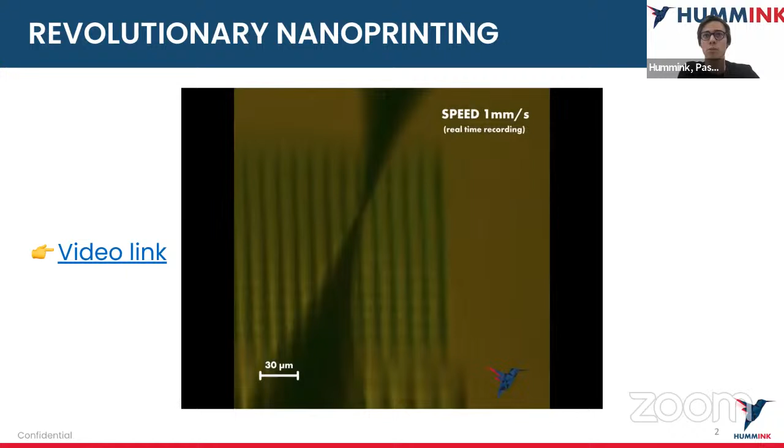To start with, a first video of what we do. Here it's an example of deposition of silver with a resolution of 1 micron, shown at real speed. This is a breakthrough technology we have developed that enables such deposition with any type of material. The question you may have now is, what's under the hood and how do we do this?

Here's a close-up on our technology, which is derived from AFM technologies. We basically replace the probe of an atomic force microscope with a glass capillary, filled with liquid. We replace a traditional resonator with a macro resonator, this big tuning fork, so that its oscillation properties are not impacted by the weight of the pipette.

We attach the pipette to the resonator, have it oscillating at a defined frequency. We put the substrate beneath on an XY table that comes close to the tip of the pipette until the formation of the first drop of liquid formed by capillarity. We then move the station on the XY axis to ensure the deposition you need.

With a unique combination of features: as I said, we can deposit any material on any surface, with resolutions from 100 nanometers to 50 microns. We also have 20 nanometer XY precision, and a deposition rate that's already fast, up to 10 millimeters per second.

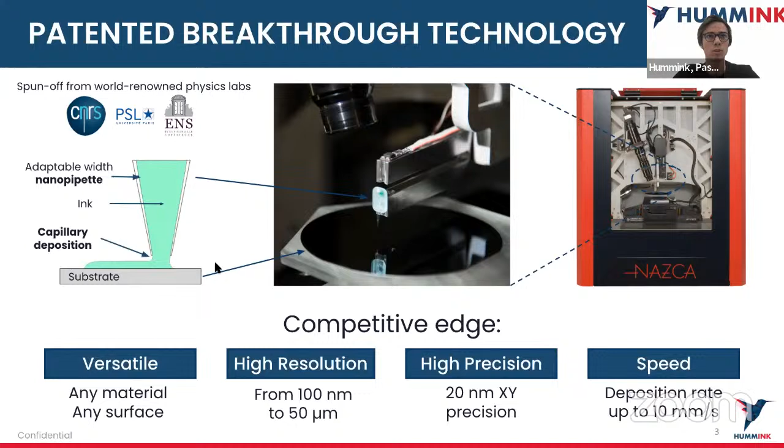Today I wanted to share with you the product release of our first equipment, called the Nazca machine. Here's a small video that shows it.

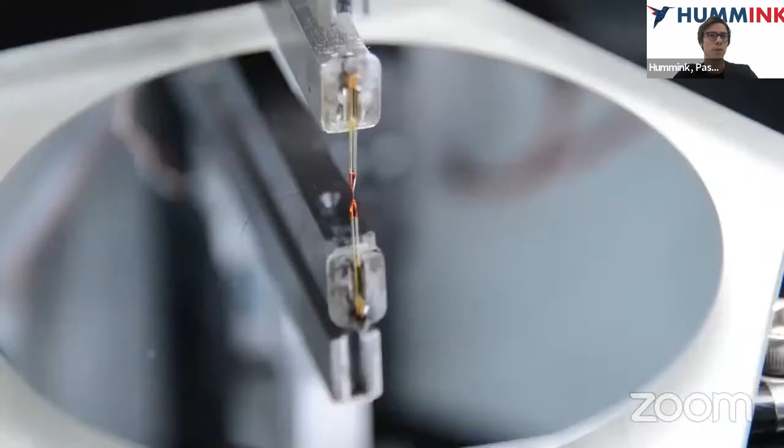The Nazca machine incorporates all the benefits of the technology I previously described. It's a tabletop equipment. Here you can change the ink and place any type of pipette. You decide the size, you decide the type of ink you want to use. You just use a very easy to use software, press start, and you're good to go.

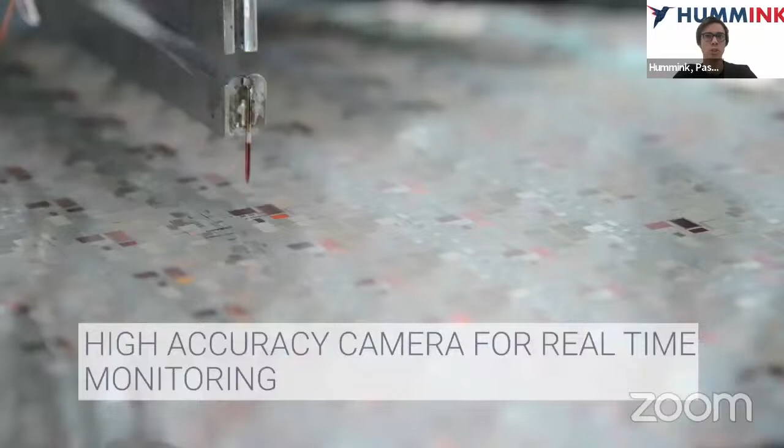This is a unique equipment that unlocks resolutions down to 100 nanometers with unique versatility in terms of substrates and material for the deposition. The working surface is 16 centimeters. You can use this for several types of applications, such as micro LED, packaging, but many more.

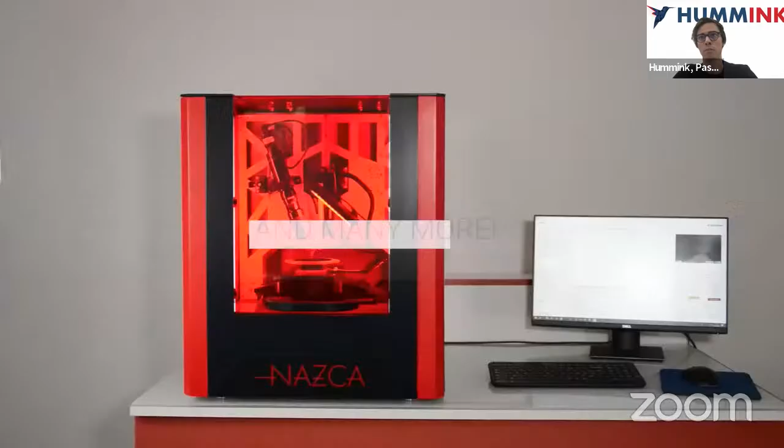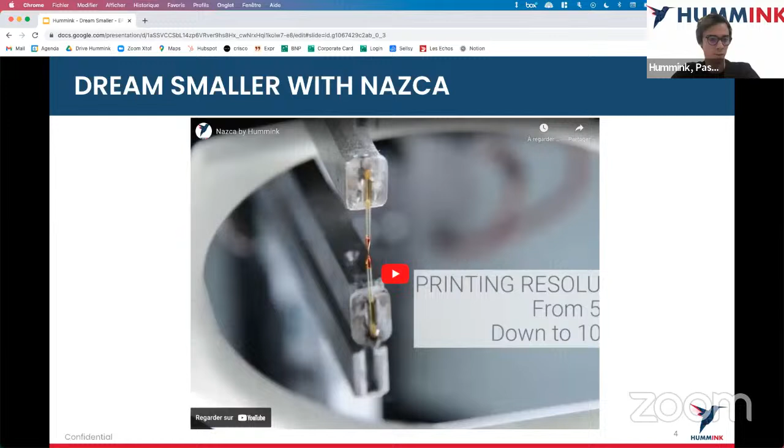This is really a product designed for R&D purposes, and designed for any labs that can work on several topics with one single tabletop equipment.

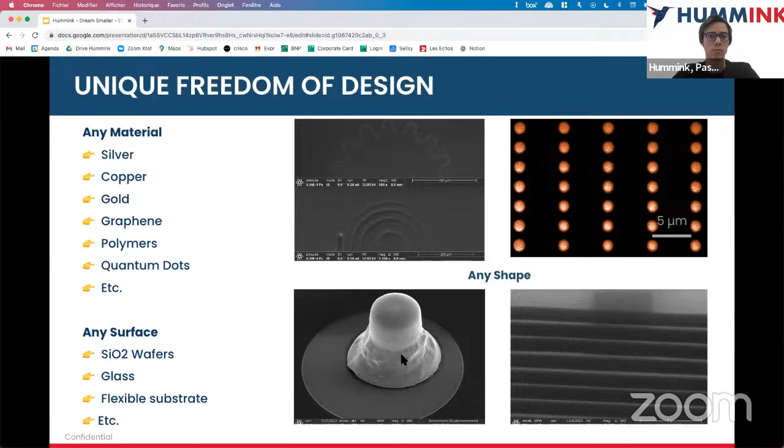So that's it, I wanted to fit into the 5 minute limit. I hope you enjoyed this presentation, and I'm all ears to any type of question you may have.

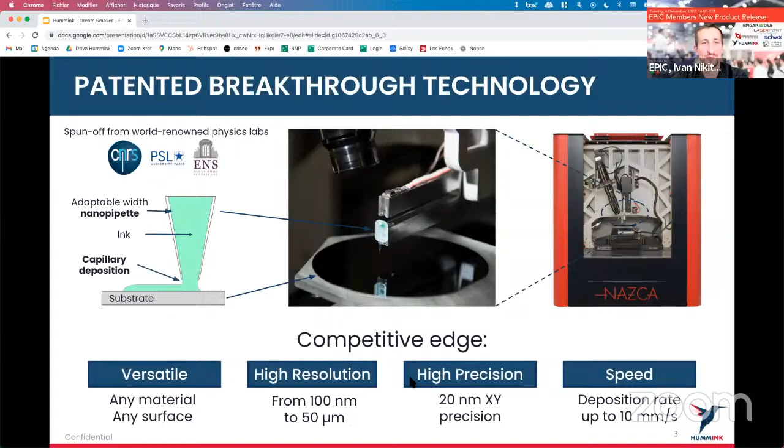Everything okay, can you see the screen correctly? Yes, all good. Thank you, Ivan. This talk is delivered by Laserpoint. I'm Sergio Pellegrino, company partner, managing the R&D activity of the company. The topic is about a new optical pressure sensor for harsh environment. I'll be more specific later.

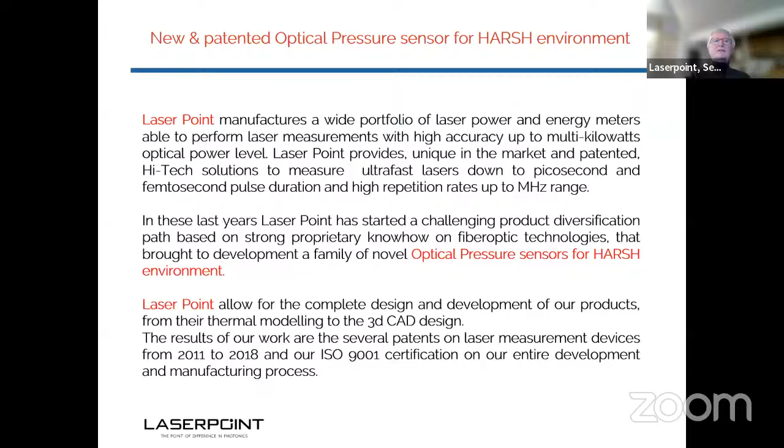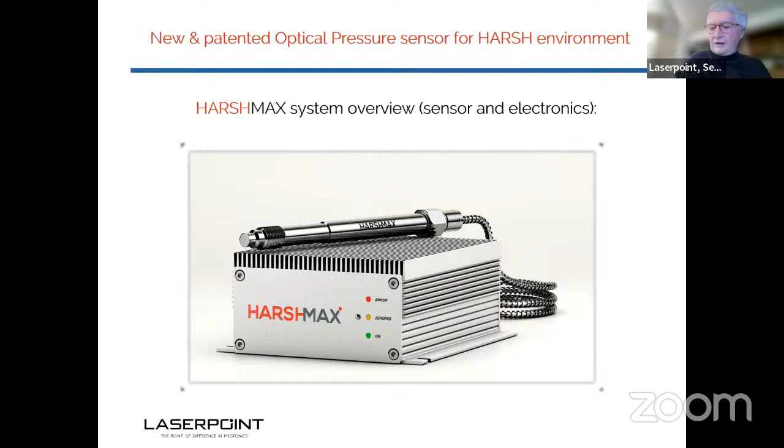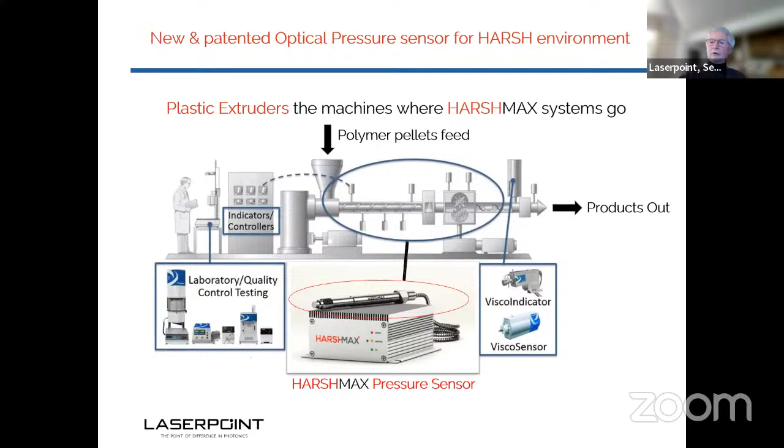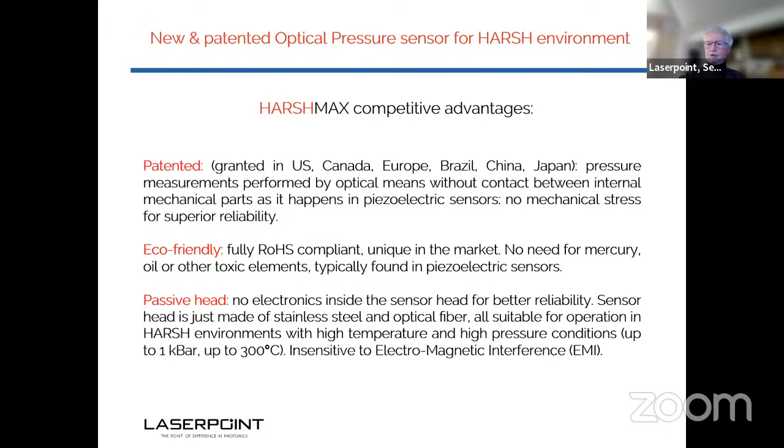So just a quick overview of the competitive advantage of the HarshMax. Beside the fact that it is patented, it is eco-friendly, because there is no mercury, no oil, no toxic elements - the head is just stainless steel and glass. The head is passive, so this is good. This passive part is what's in contact with the harsh environment, pressure and temperature, up to 1 kilobar in our product portfolio, and 300 degrees.

Another key point is that the rack with optics and electronics is remote, just connected by an optical fiber. So it's far from the harsh part and dirty part of the job, and it's easy to plug and unplug the sensor for eventual replacement. At the end, it has a low maintenance cost because of the high sensitivity of this system.

The deformable diaphragm is relatively thicker than competition. So it's more difficult to have it damaged.

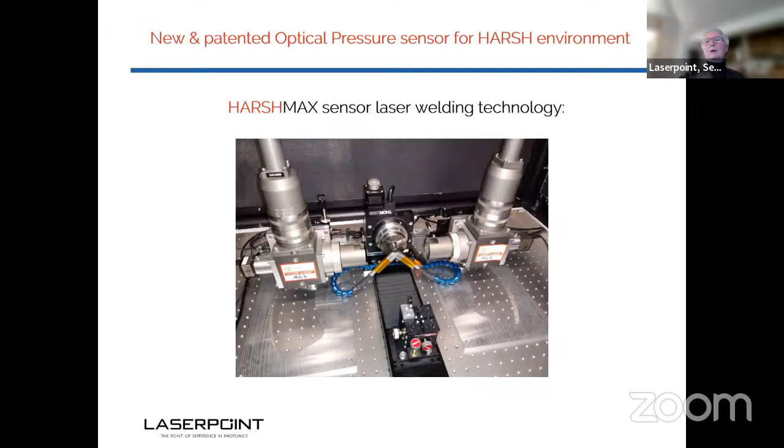So most of our technology, realization technology, is based on laser welding technology. There are several steps of laser welding technology here, just to show you which is our equipment in the R&D lab.

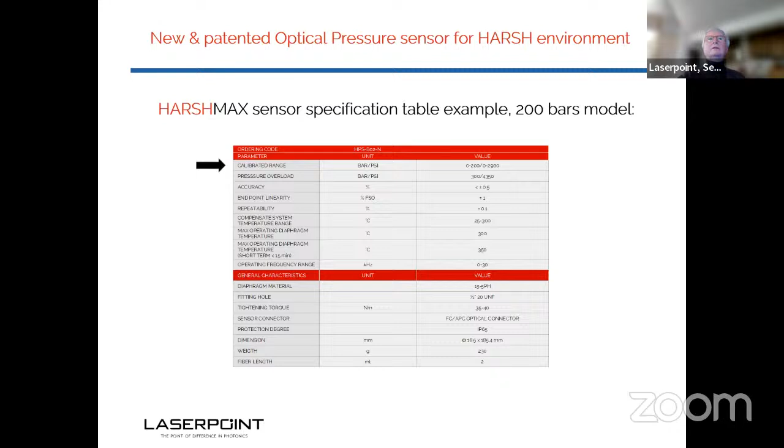Then we are close to the end, I hope I am in time. Just to show you an example of a sensor specification table for the 200 bars model. That sensor should stand to 1.5 times the maximum rated pressure, so in this case it's standing 300 bars, again at 300 degrees C. So here is the response of the sensors: pressure versus output voltage.

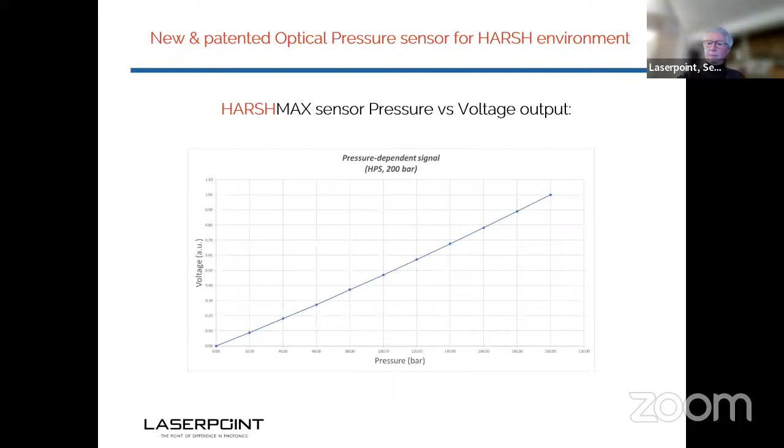You see that it is exceptionally linear, no hysteresis, which means that for us it makes the realization easier, because we do not have to apply a complex calibration algorithm to the system.

So in conclusion, we are introducing to the market of plastic extrusion and injection molding a new optical pressure sensor, we call it HARSHMAX, which is patented, eco-friendly, passive, with remote electronics, and a low maintenance cost. Thank you very much for your attention.

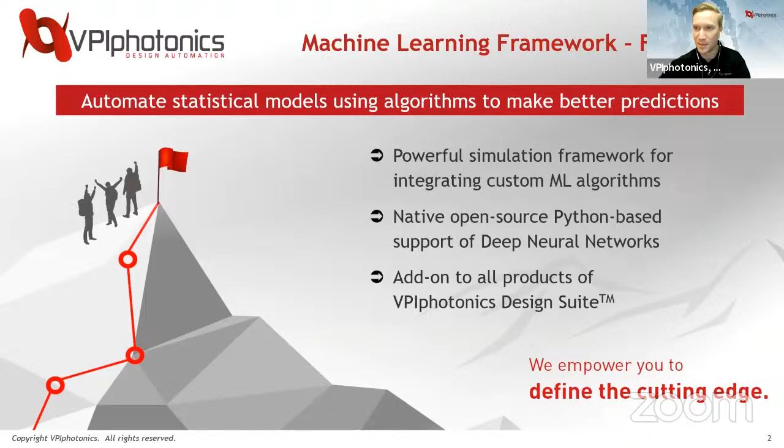So just to start, the machine learning framework is a way to automate statistical models using algorithms to make better predictions. What we've implemented is this powerful framework into the software using open source Python-based deep neural networks, and this is an add-on to all of our products in the VPIphotonics design suite. So to get you started with the workflow, how this actually works is you start with VPI Design Suite, you simulate, you create a design for a component or a system, as you would in the typical software.

We have an API where you can define your machine learning algorithm. We represent the data so you can store large sets using an HDF5 file format. Then we take our machine learning algorithm, generate simulation data for it, and use that data to train the machine learning algorithm. In the end, we have a machine learning model, and we can use that integrated model and algorithm back in your simulation again.

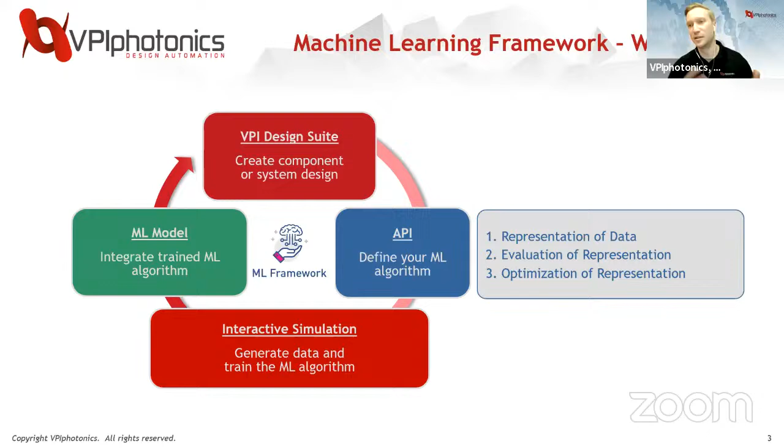This fits into VPIphotonics design suite. We have tools at many different levels of abstraction, from devices all the way to networks. This fits in VPIphotonics design suite, which includes transmission design, so optical system, VPI transmission maker optical systems, as well as component design. If you're designing a fiber amplifier, you can use VPI component maker fiber optics, or if you're designing a photonic integrated circuit, it can be used in VPI component maker photonic circuits. Really where we started with this is at the optical transmission system level. I'll take you through an example of that today.

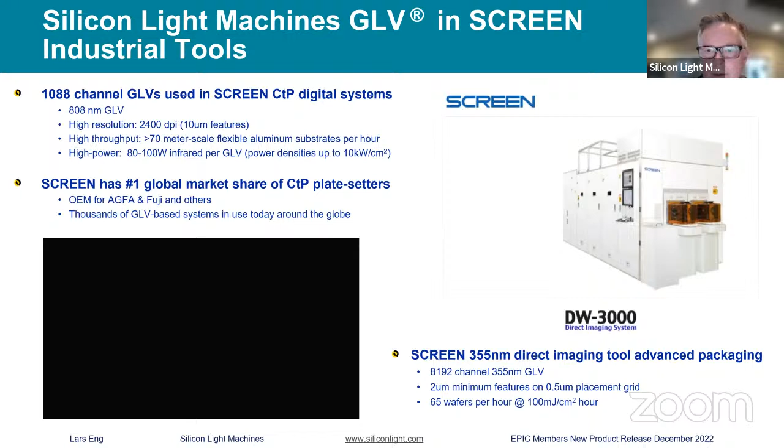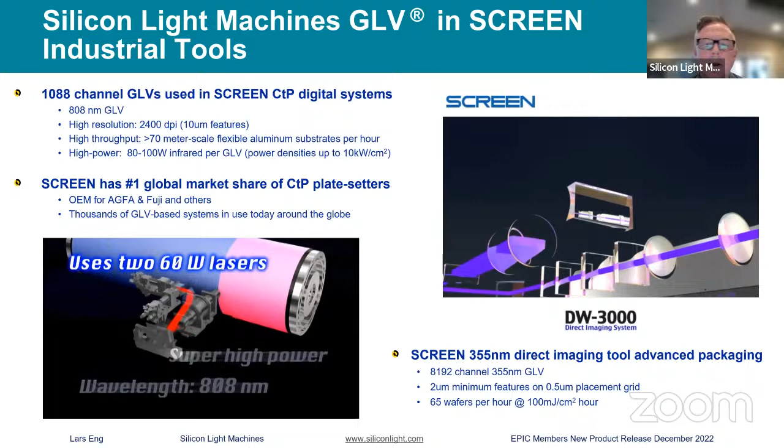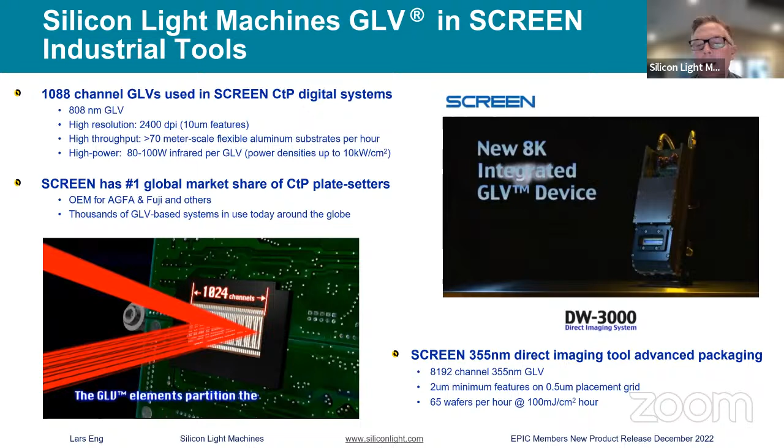Okay, so now the movie on the right here is showing the Screen direct imaging tool that uses our UV grating light valve that has 8,192 channels, and this tool prints 2 micron minimum feature size, and it produces 65 wafers per hour, so it's a high throughput tool. That's kind of a background on Silicon Light Machines and Screen.

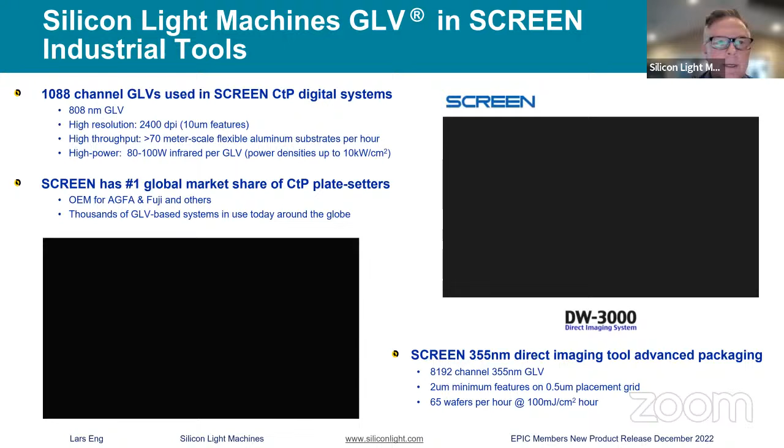And the grating light valve actually isn't bad. It can modulate 100 watts of IR power, but that's about the limit.

The limit is because of the very narrow active region, so it's a small active area, and the power handling is limited by heating. The PLV, on the other hand, can make an arbitrarily large active area.

With this, we can illuminate these large areas with up to 1 kilowatt of laser power. So we can go from 100 watts to over a kilowatt in optical power modulation.

For materials processing applications, the line beam is actually a very nice way to operate it. We've configured this PLV modulator in a linear drive configuration, which is ideal for high power scanned line systems.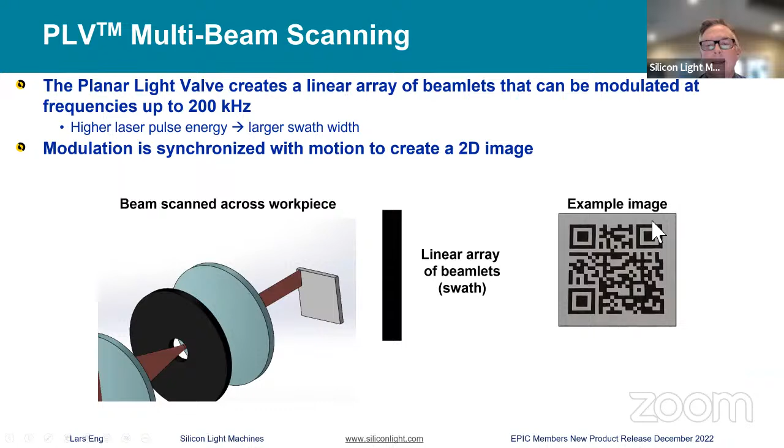We have the option to put in a galvo scanner, and typically would choose between a galvo scanner or physical motion of the media.

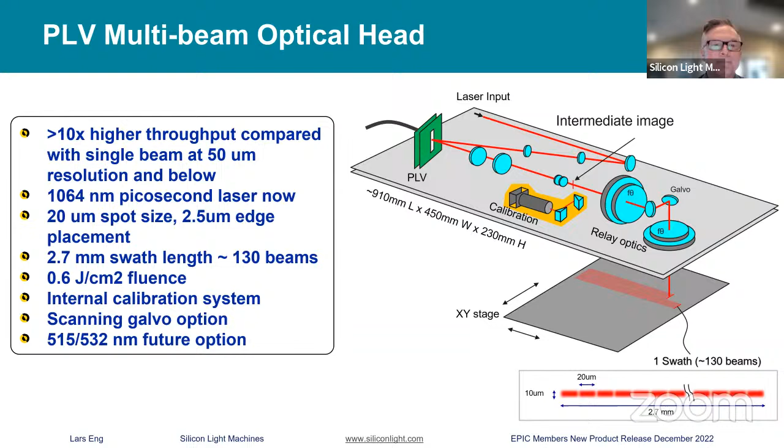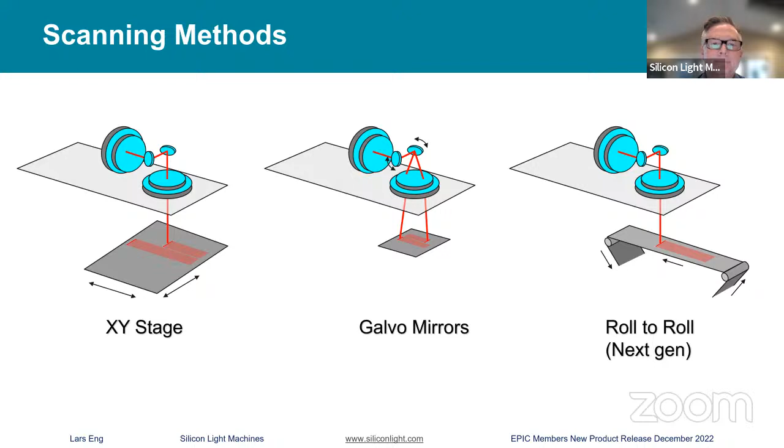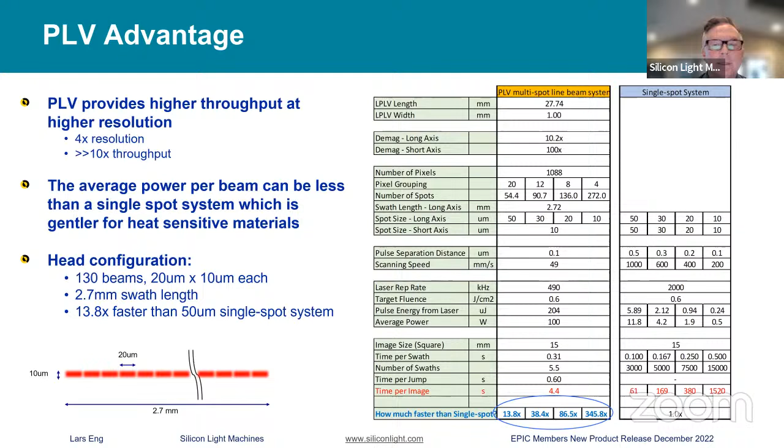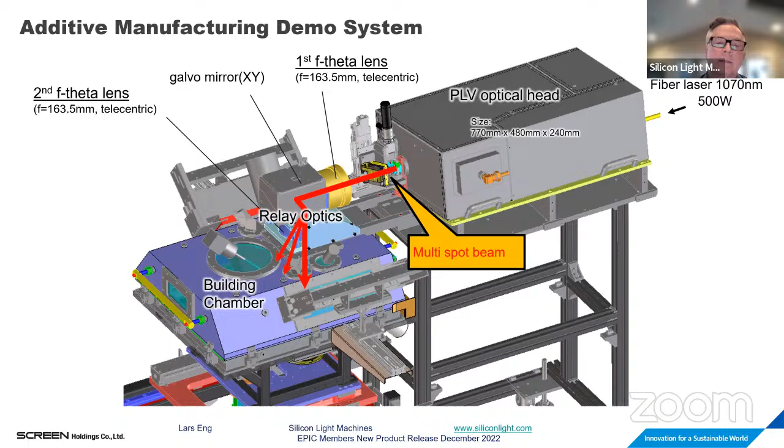So a couple of applications or demos. This is an additive manufacturing system demo built by our parent company Screen. The input to this optical head is actually a CW laser at 1070 nanometers. We have a 500 watt beam coming in, out comes a multi-spot beam, and we relay that onto the work surface. For traditional polymer additive manufacturing, you lay out a bed of polymer material, and then the beam comes across and selectively melts the material as needed for each layer.

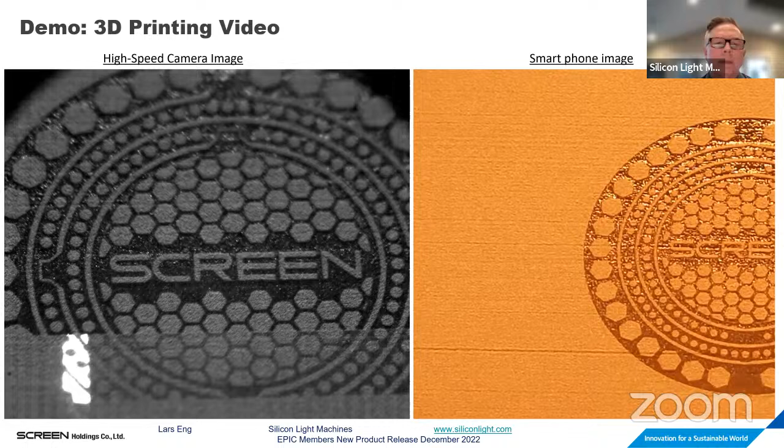This is a demo of that system. It's showing each swath coming across the screen, and then there's a new bed of powder put down, and the process repeats itself until the final part is built. The advantage here is it's a high resolution polymer system with high throughput, and that's one of the two applications we're showing today.

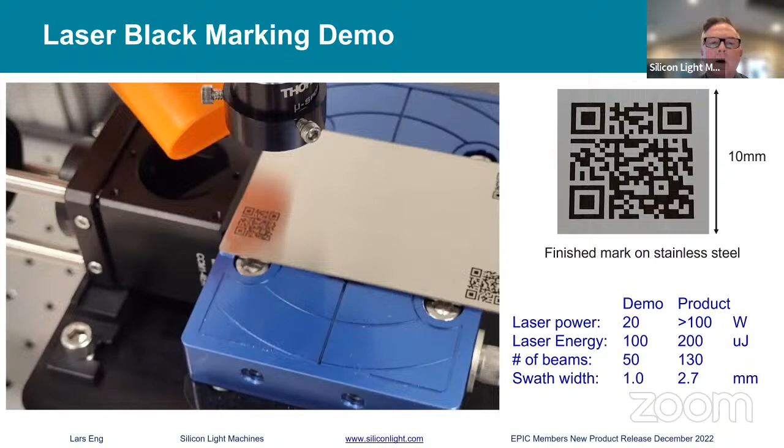The other application is laser black marking, black marking stainless steel. This demo system has a 20 watt picosecond laser with 100 microjoules of beam energy, and we can get 50 beams out of this system with a swath width of 1 millimeter.

For our product, the laser power will be greater than 100 watts, the laser energy will be 200 microjoules, and we'll have 130 beams and a 2.7 millimeter swath, so much higher throughput even than this demo.

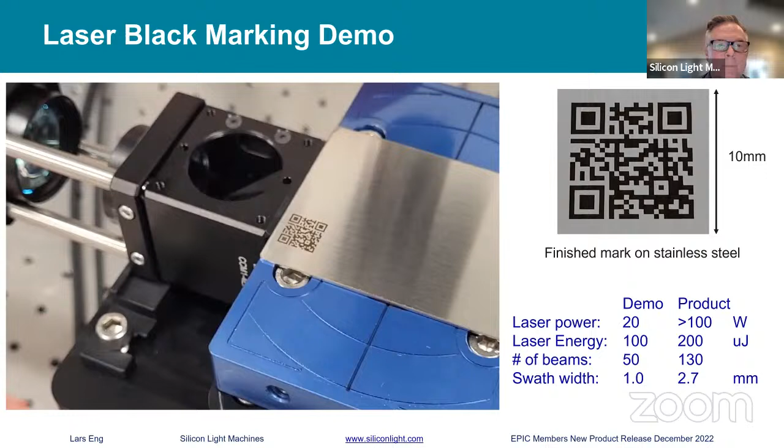We can mark lots of different things. We do QR codes, we've done logos, we've done text, we've done images. That's my dog. Overall, if you look carefully, the quality is very high. We come from a heritage of 2400 DPI printing, and I think it shows in the quality of these prints.

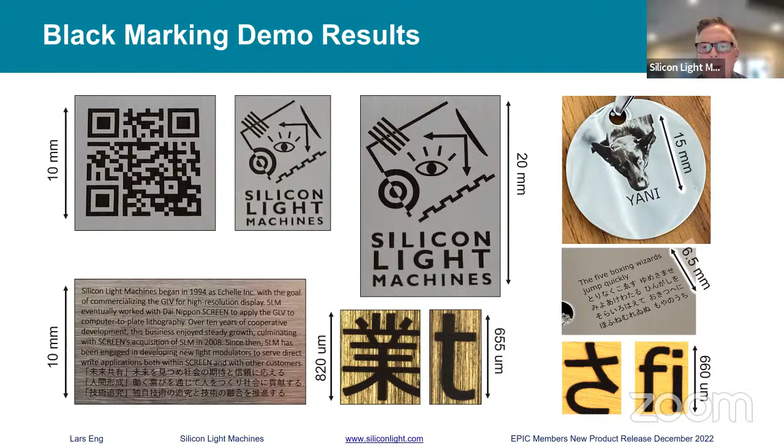So in summary, we're building a high throughput multi-beam optical head suitable for laser processing. We have excellent image quality, high resolution, superior throughput, and we can customize it to support various applications such as stainless steel, plastics, and other materials.

The range of wavelengths we work at are anywhere between 355 nanometers and 1064. We can work with picosecond, femtosecond, nanosecond pulse lasers, as well as CW lasers. We have an integrated calibration unit into the head, and we can add a galvo scanner, and we can synchronize with XY stages or roll-to-roll.

This product, in the process, we just finished the design. We'll have our first product release in July of next year. For more information, we'll be at Photonics West, with a paper called High Throughput Spatial Light Modulator Based Multi-Beam Marking System. If you want an overview of our technology, there's not enough time for me to give it here, so please check the YouTube link, and please come give me a call or send me an email. Thank you very much.

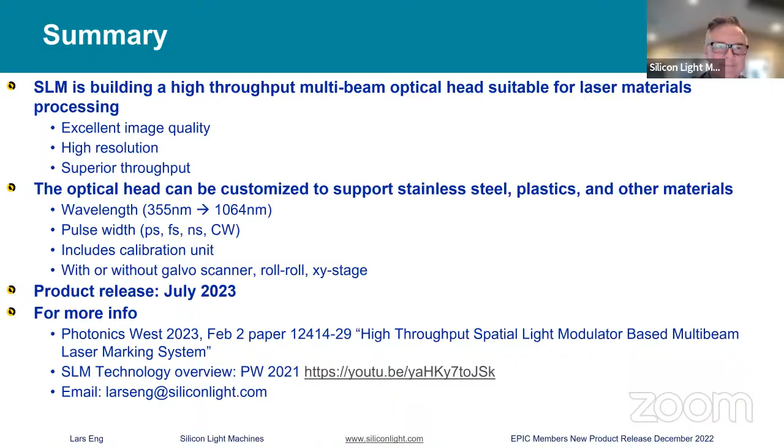I was actually wondering, Lars, myself, can the same type of optical heads be used in lithography type of patterning with multi-beam for multi-beam lithography?

So the first, yes, it can. The first slide I showed you was an actual lithography tool, a multi-beam lithography tool that has 8,000 channels. So it doesn't require the power. What's different about this is really the additional high power aspect of it. We can put kilowatts of power on the modulator as opposed to 100 watts. Typically lithography doesn't need that much power.

Right, right, it's a high power optical head, indeed. Yep. Okay, anyone else?

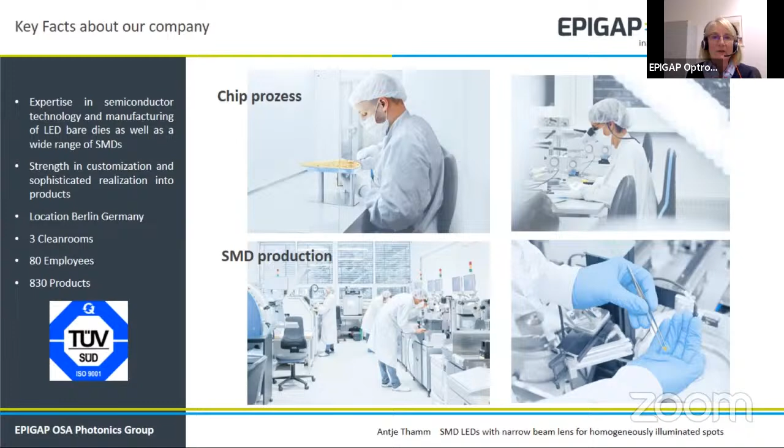Our production is located in Berlin, Germany, and we are working with 80 employees on about 830 products. For this, we have 3 different clean rooms, and in the first clean room we have the complete chip production. We are working with A3B5 semiconductor material, and this gives us LED chips in the visible range and in the near infrared range up to 1720 nanometers.

The main steps of our technology are metallization and the photolithography process. We are doing 100% testing and binning, and we are checking spectrum, peak wavelengths, output power, and forward voltage from every chip. After testing, we have the following steps with dicing and test and qualification.

In our second clean room, we have the automated SMD production line with products in the range from 225 nanometers up to 1720 nanometers, so we cover a wider range here. And in our third clean room, our assembly of customized chip-on-board modules is located.

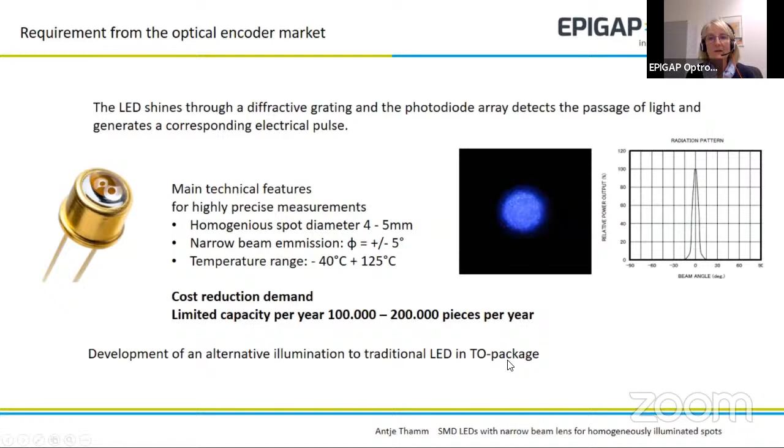In the next slide, I present the steps and results of this development. Normally, if we are talking about an SMD, this narrow beam emission is difficult. So we started an optical calculation and simulation and found out that a double lens array can give us a really narrow beam emission.

After this calculation, we started with the mold making for the lenses. The next step was lens shaping, and then a sample production run starts. We fixed our SMD chip as usual on an aluminum nitride ceramic based substrate.

We reached an equal output power comparing to the TO package, and the temperature range was also in the required range. This product is automated solderable, so a big advantage for the customer. We reached a cost reduction of 40% of the unit cost, and we can increase the capacity up to 500,000 pieces and more per year.

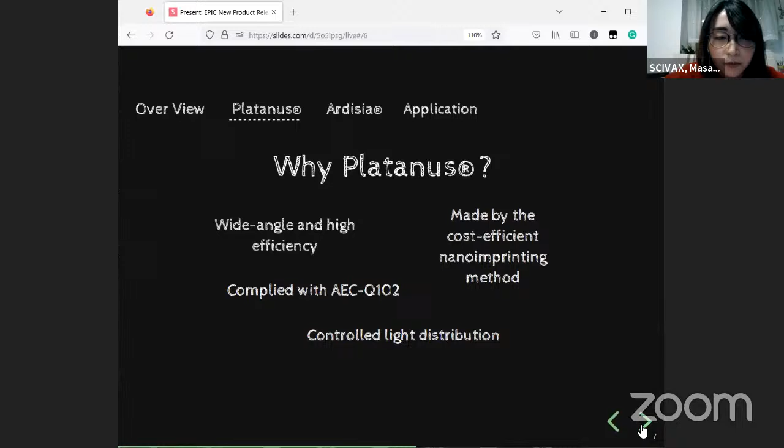Platanus, the optical diffuser with a wider angle of illumination for TOF sensors, is applicable for a variety of emerging applications such as automotive and XR. Not only are all of the optical components from SCIVAX made by the cost-efficient nanoimprint method, but also with high reliability and great performance.

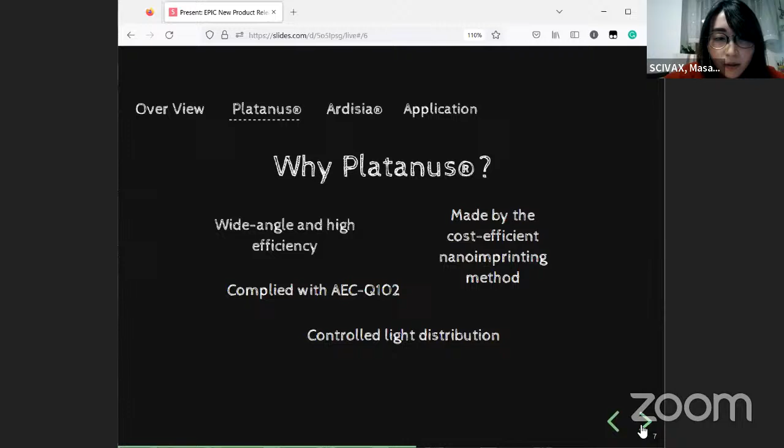Along with the Platanus, we also developed a new optical component called Ardisia, by using both the refractive and diffractive functions of light to solve various disadvantages with common DOEs. Ardisia can achieve an FOI of 140 by 110. It also integrates the collimator lens in one component so that it could achieve compactness and also low BOM cost; power efficiency and power intensity are other benefits of Ardisia. Our customer confirmed that Ardisia has 27% better efficiency than conventional DOEs.

By the combination of Platanus and Ardisia, we think this is the best solution for 3D sensing needs of automotive and XR.

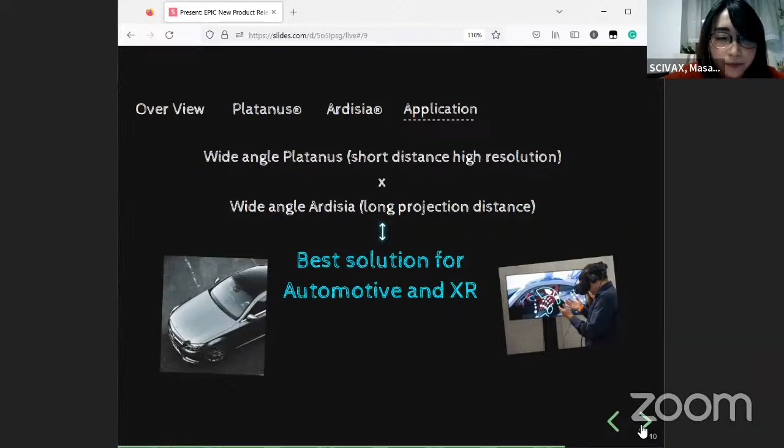Last but not least, our nano imprint foundry service provides customization together with internal optical design and simulation experts, and process development can support your own customized optics for various applications. Thank you for listening. If you have follow-up questions or any sample requests, you can contact us by sending emails to this email address.